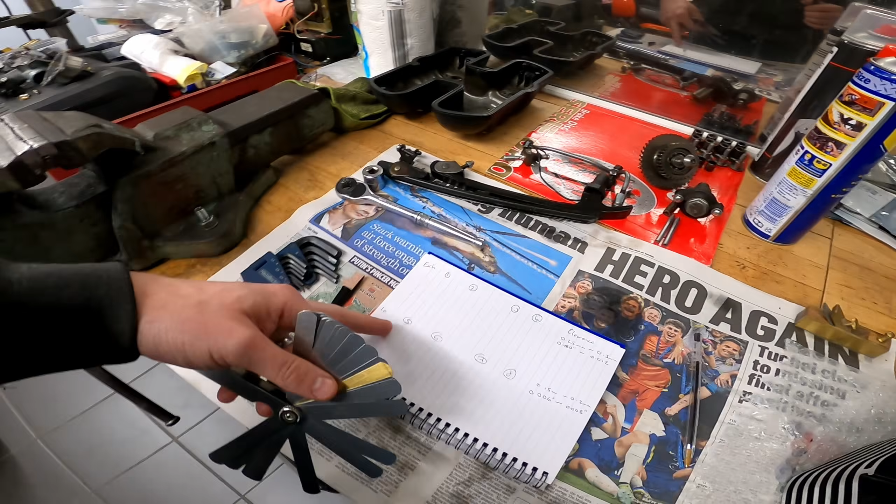Okay, so hopefully this is going to translate. You see I've got it marked out here, so just exhaust 1, 2, 3, 4. It's an 8 valve head. And inlet 1, 2, well 5, 6, 7, 8, but 1, 2, 3, 4. Then over here I've got the clearances noted, so it's 0.25 of a millimetre to 0.3 of a millimetre, and 0.15 of a millimetre to 0.2 on the inlet side, which correlates to 6 thou to 8 thou of an inch and 10 thou to 12 thou on the exhaust.

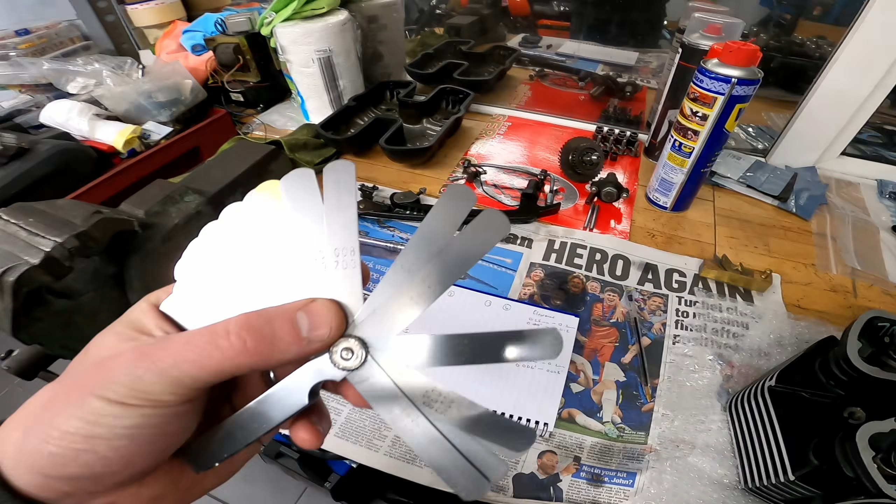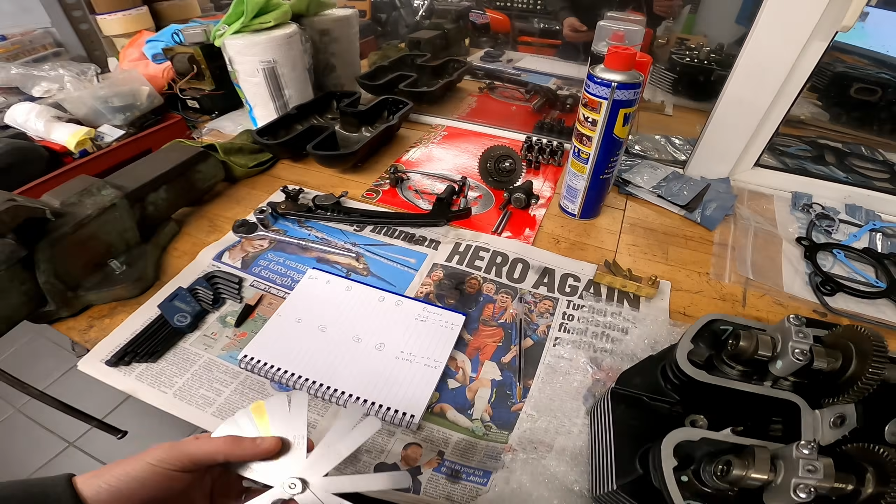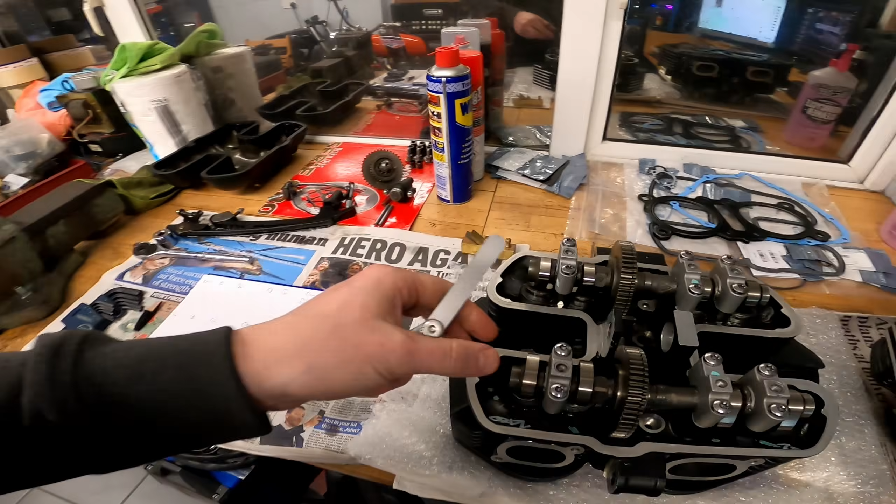So what I will literally do is just take the bottom tolerance, try that in, and then work my way up and see where we land through a combination of these. So you can see, for example, if I take the inlet, so 0.152, I've got here, a bit difficult to film, I'll come in from the top, and so that goes in. A little bit of drag there, but not a lot, so we're going to be a little bit more than that. So I'm going to work my way through these through combinations of feeler gauges, mark these down, and then we'll see how far away we are.

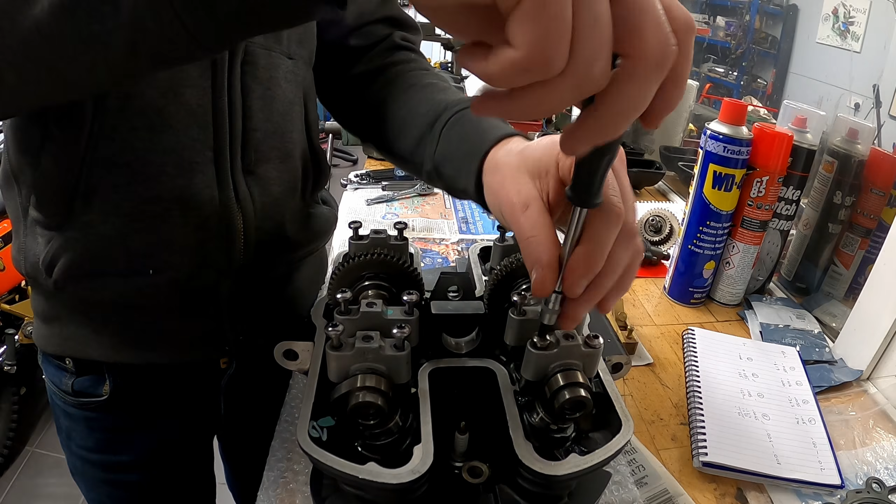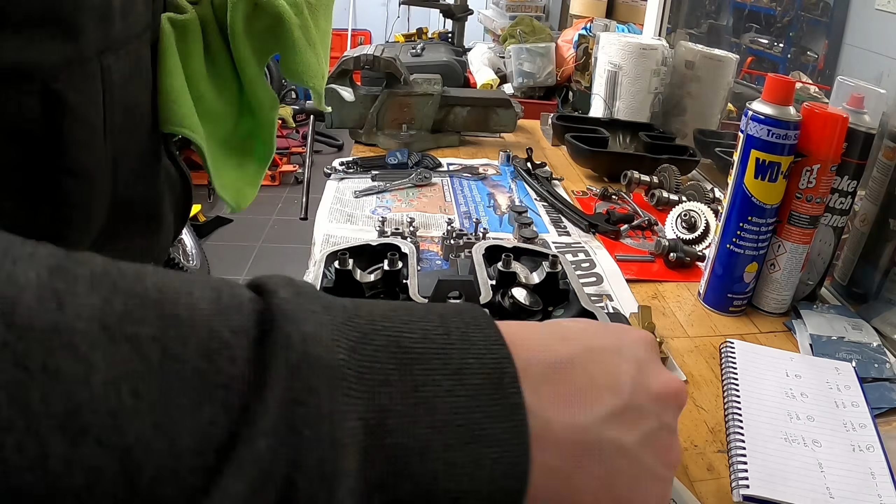So you're okay with that footage? Well, yeah, that what you've just done. Yep. Yeah, that's fine. Okay, so I've just explained to you valve clearances. And then you're going to tell everybody how we do valve clearances, and then I'll tell you what the calculation is. Right, but I don't think I fully understand.

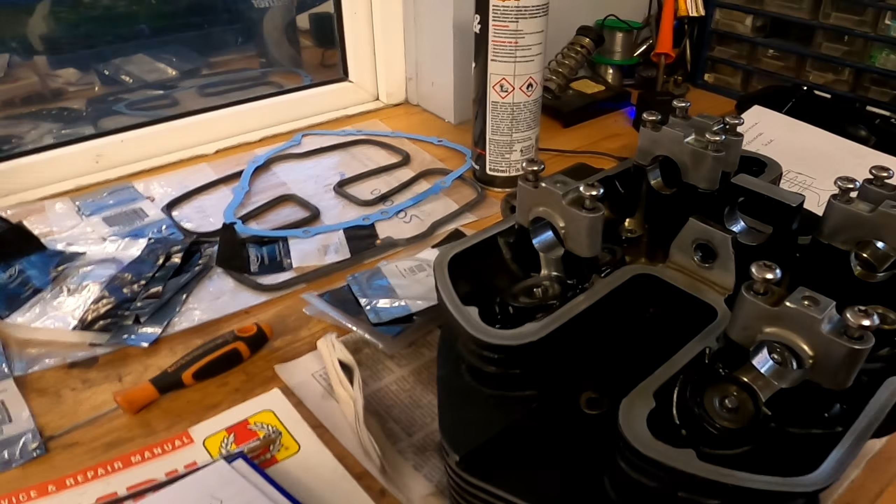Okay, right. So these pieces, I'm sure I've got a name. Camshaft with my pear drops on. Cams. They go inside along here, and then my pear drop is going to turn round, and the pear drop presses on this, which is lower in here, and so each of these valves are different heights, because each of these round things have these little bits in them that are different thicknesses, and we have to work out which ones of these we need, because you don't put more than one in.

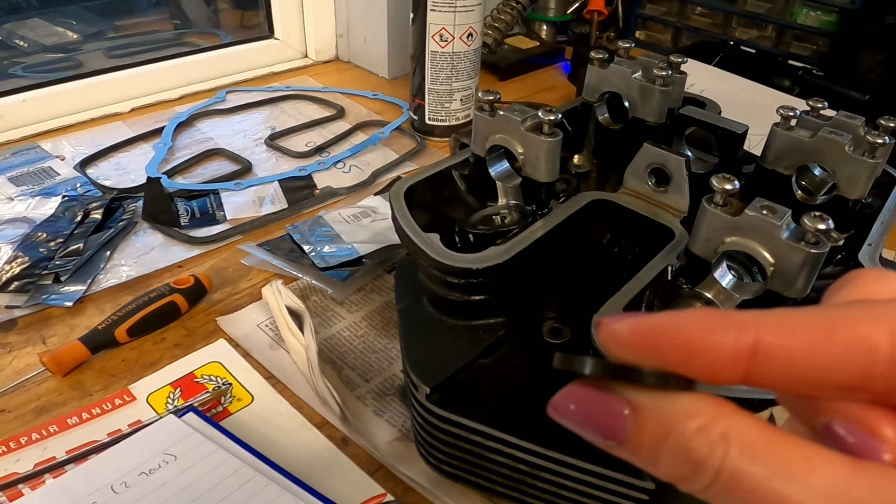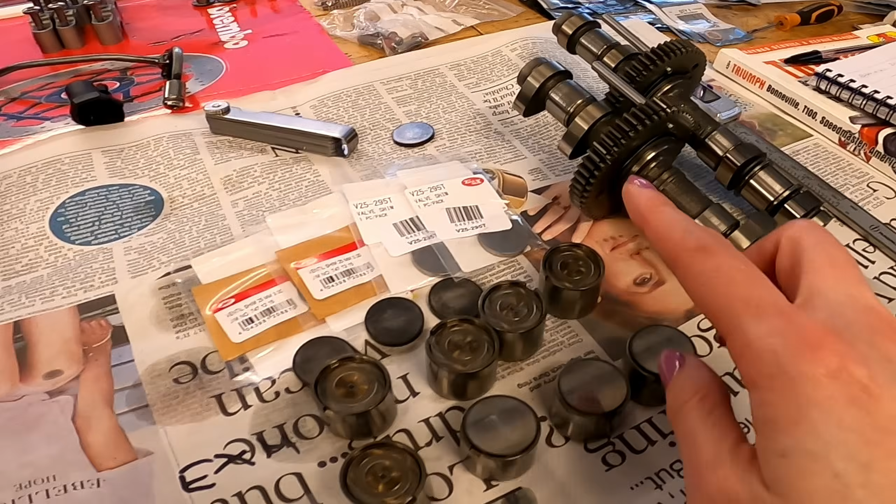These are different thicknesses, so we need to work out which thickness we need to go inside. We've got 5 remaining. Joe's worked 3 out, and we've now got to work out which thicknesses we need to go in there for when my pear drop turns round and touches it to press the valve.

But what I don't understand is why they're all different. What makes them different? Whether the pear drops are different sizes. So these will be different slightly on tolerance, plus they'll have worn slightly differently. Then how compressed the springs are against the valve, because the valve seat will be slightly different, because you've got a machining tolerance for these to be sealed in here.

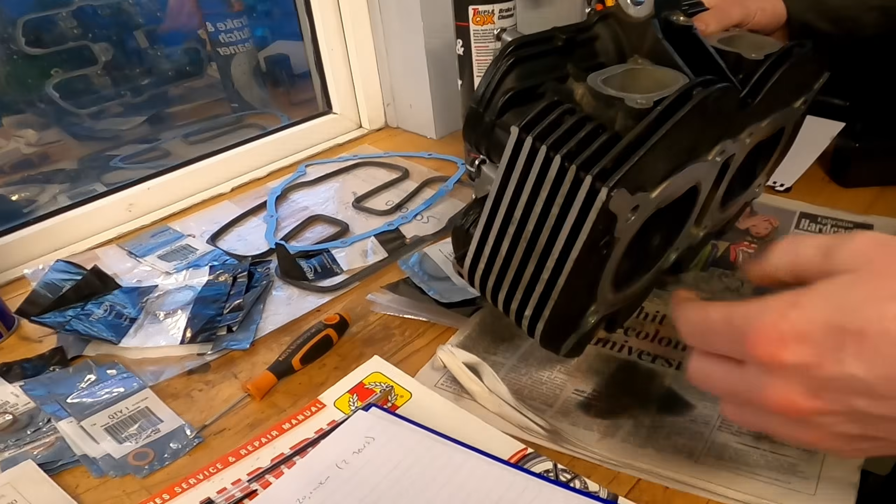So that's the other end of that valve. Okay, so under the thing that was poking up, there's a spring. Yep. And depending on how compressed that spring is, based on how long the valve is. So there's a couple of differences. So okay, help me understand. You've got very badly drawn cam, pear drop.

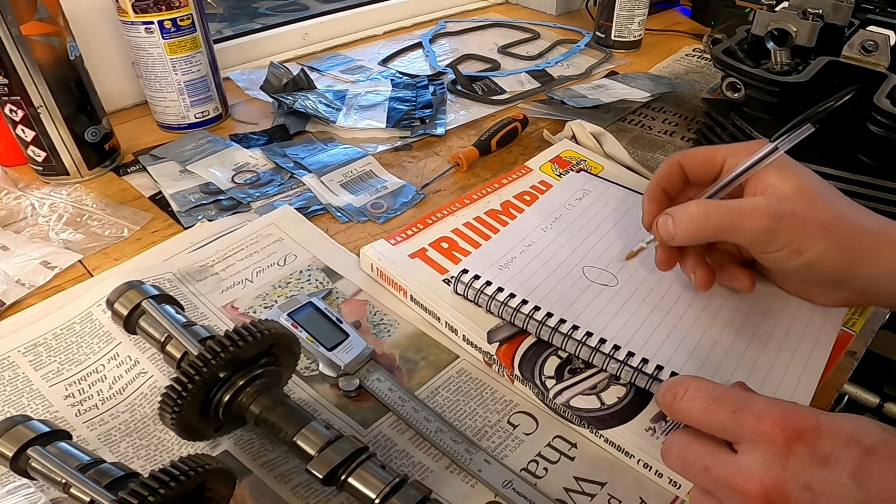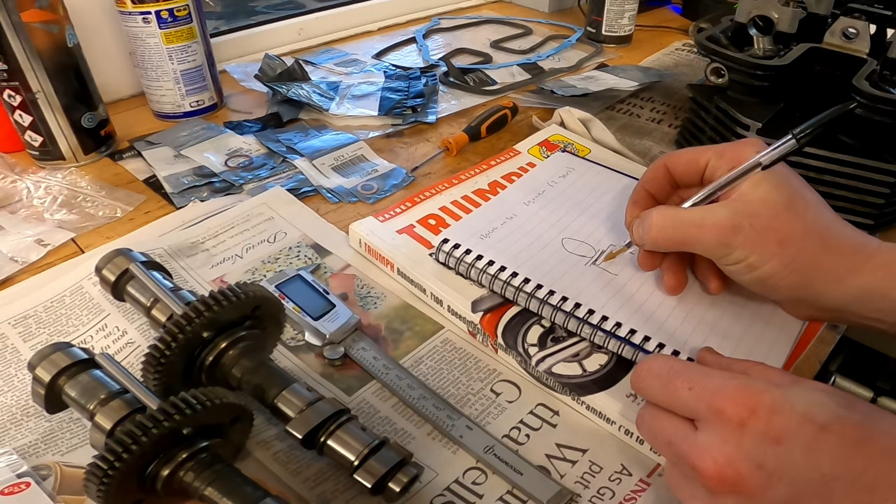Then there'll be a gap. Yep. Yeah, that's what we're trying to work out. Yeah, under that gap, there is the bucket, which is this. Which is those, yeah. In the top of there is the shim, which is what takes up the tolerance. Okay, so we're trying to get that to an ideal thickness, and it's different for the inlet and the exhaust. Okay, this then, as you said, acts upon the valve, which is a very badly drawn valve.

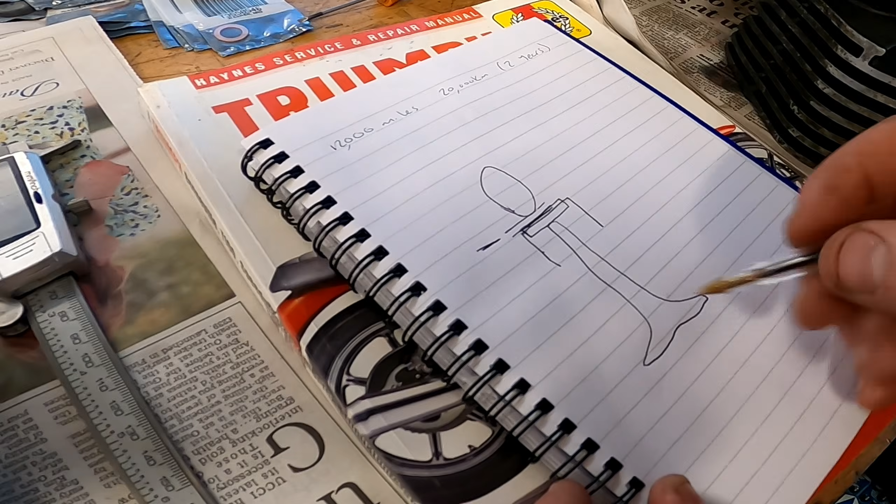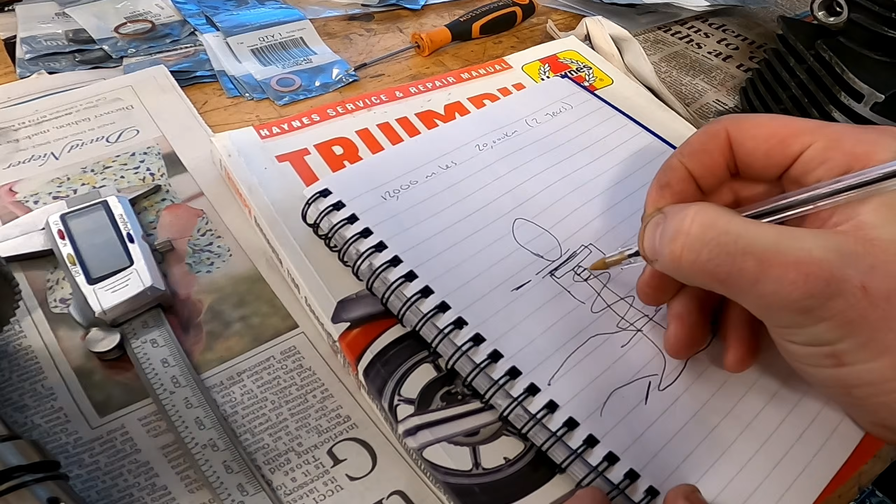It's like that in the cylinder head. Yeah. Okay, that sits against the seat here, and then there's a chamber like this. Then there's a spring in the cylinder head. Okay. The collet there that holds all this together is retained by a groove here and some little pieces. Okay, that sits on top of the spring, like so.

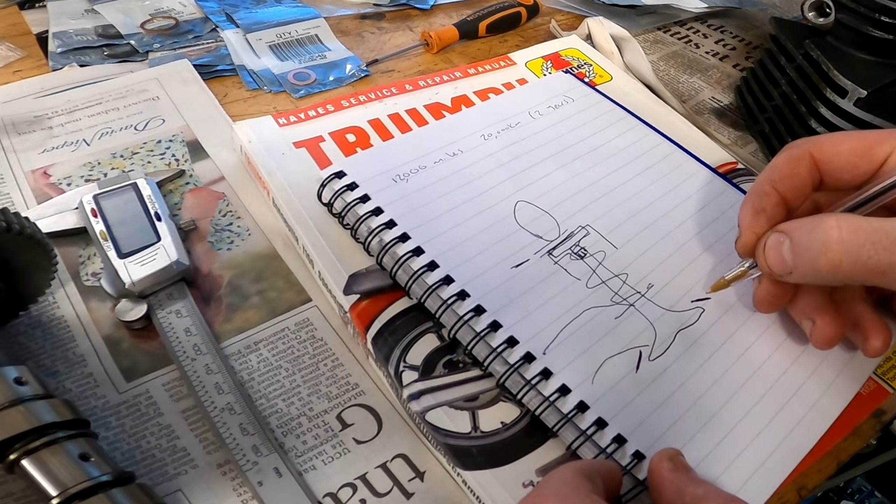So what we're trying to account for is this will have been machined slightly different, and these edges will have worn slightly different, and so will these. So this will have changed. In general, it will move this way, right, making this move higher up.

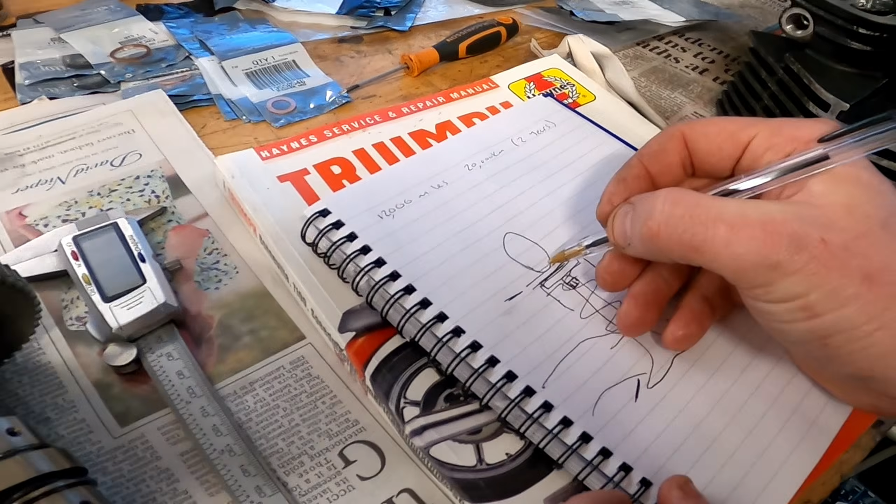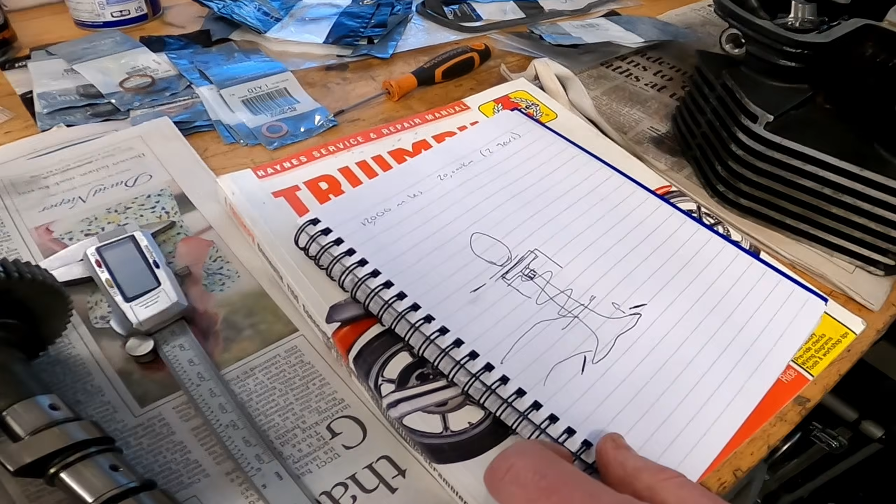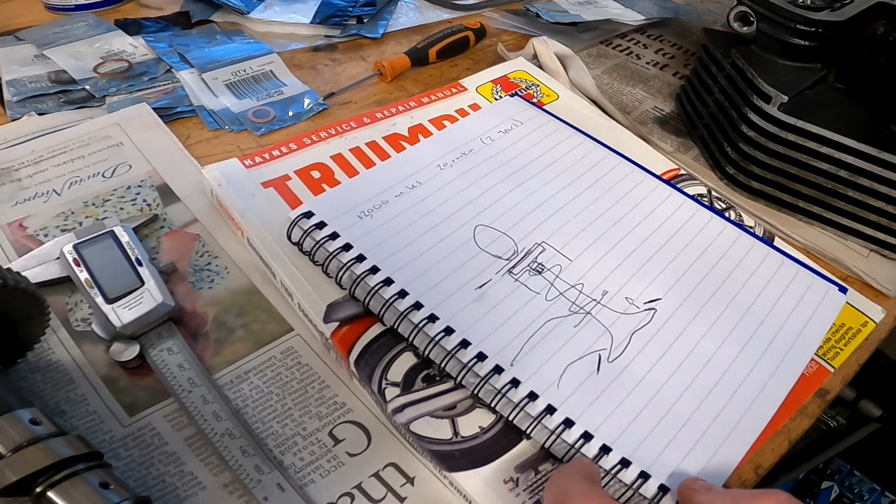If this is all moved up, the gap is smaller, but if this is worn, the gap gets bigger at the bottom of the cam. Plus, when they're manufactured, they'll all be slightly different, which is why you have the shims. So when it's worn, it's because we're using a used engine in the first place—these aren't new pieces, so it's been worn through previous use. But also these ran in a different cylinder head, so the clearances will be different, the way it was machined will be slightly different. There's tolerance on everything, and that stack of tolerance is what makes the difference across the valves.

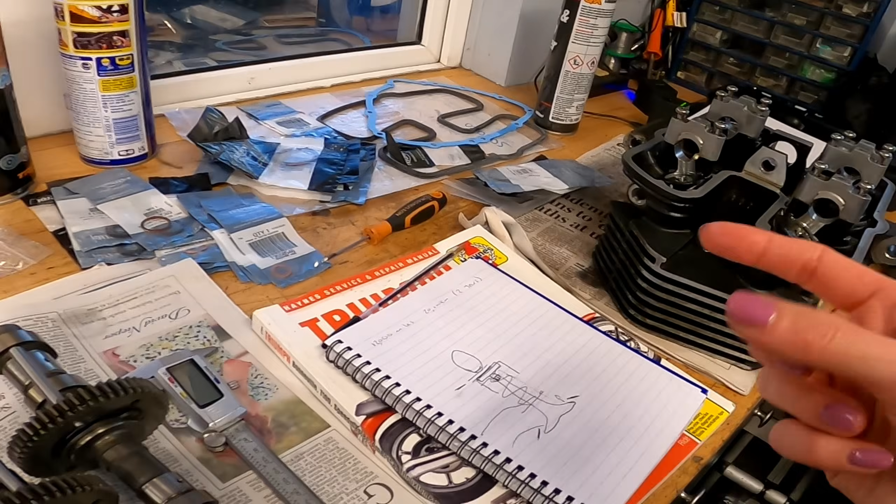So for each one we've got to account for all these variables: the differences in the wear at the bottom, how compressed the spring is, the wear happening at the top, and the wear on each of the pear drops inside. They'll be different on both sides too, because one's the exhaust side and the other is the inlet side—so in and out. The exhaust side has a bigger tolerance because it gets hot.

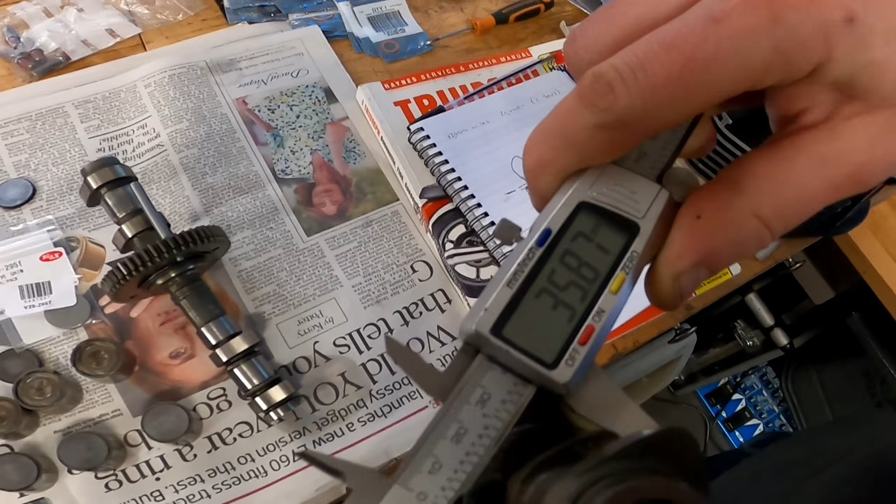Just do the top again because I missed it. 0.87... okay, 35.9. So that's 0.3 of a mil difference, cam to cam. Now our tolerance—the top end of our tolerance is 0.3 mil, just as a gap.

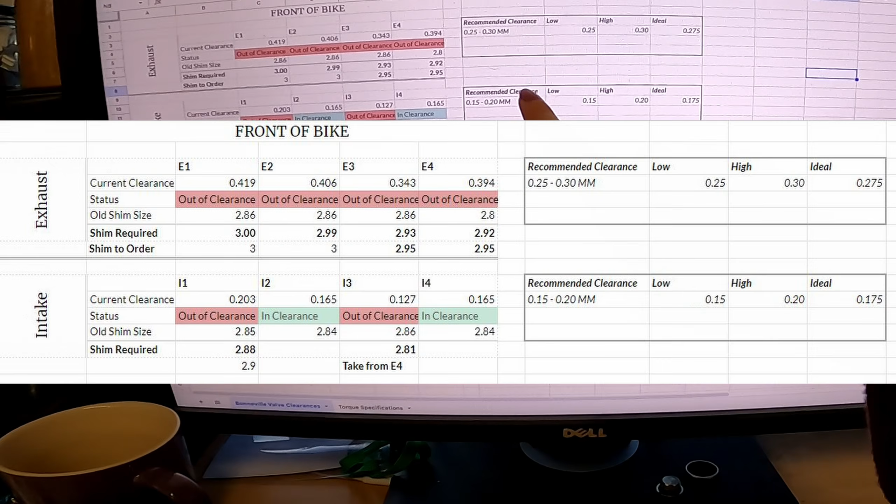So you've already got to account for that in the shimming, in your spreadsheet. So I've cheated—I don't know if this is going to translate on the camera, but Joe has put into the computer a recommended clearance for the exhaust and for the intake. So when we're measuring it, we can see what the numbers should be in between. And then he's done some Excel spreadsheet wizardry to work out what the new shim number is going to be. Okay, so let's work it out.

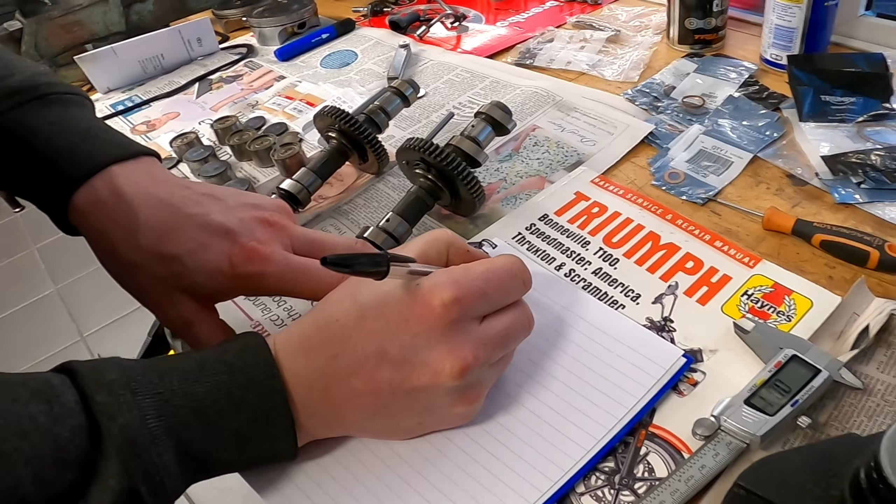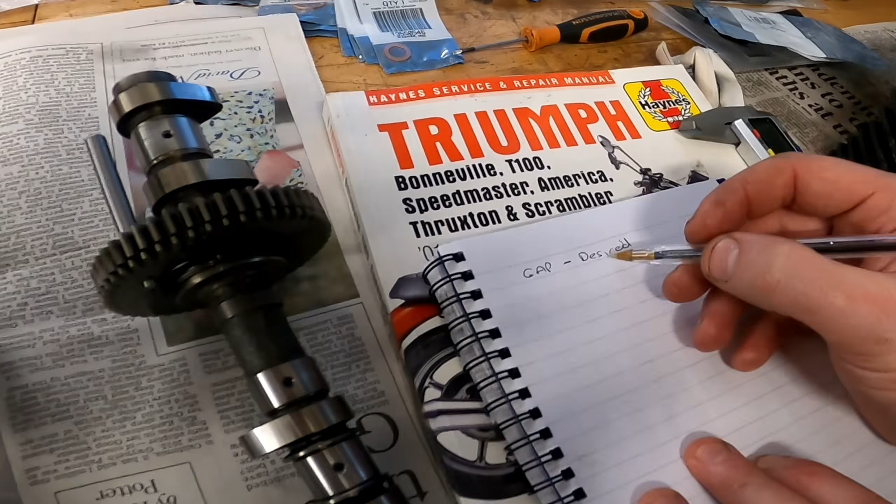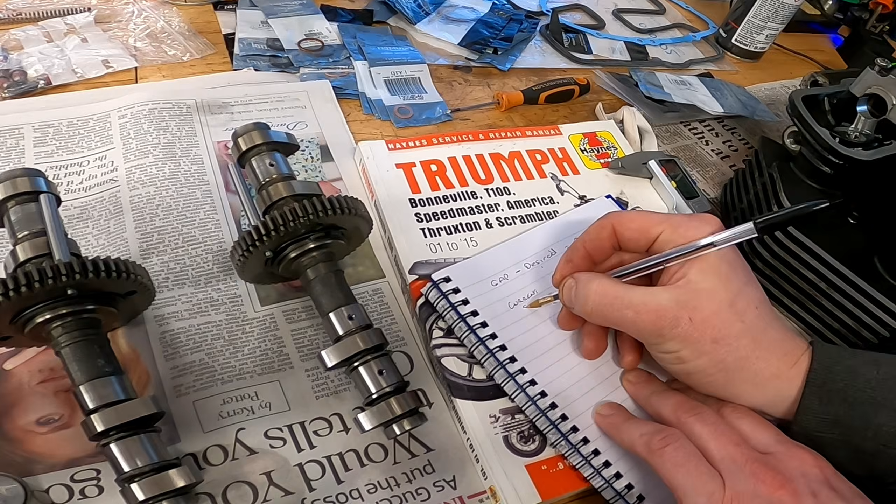So what we do: as I've just measured, we take the gap that we measure, and then we take away from that what our desired clearance is. That gives us a difference. Then we take the current shim size that's fitted when we did this measurement, and we add this difference. That equals our new shim size.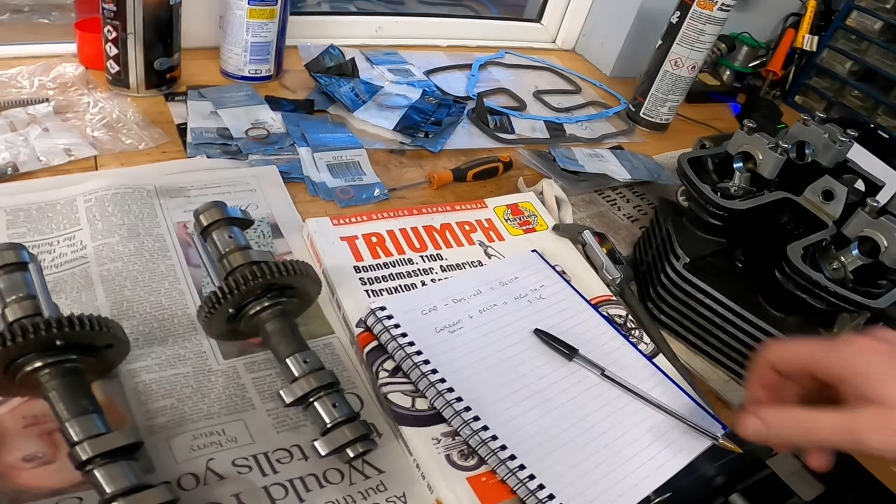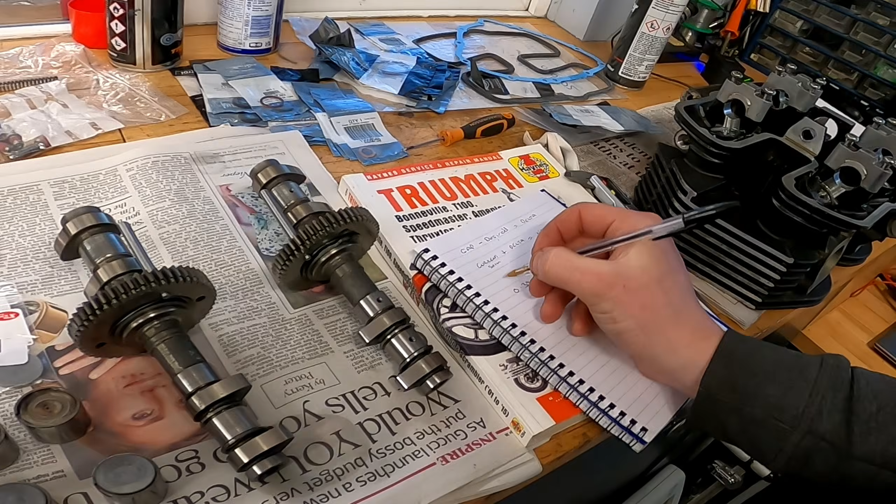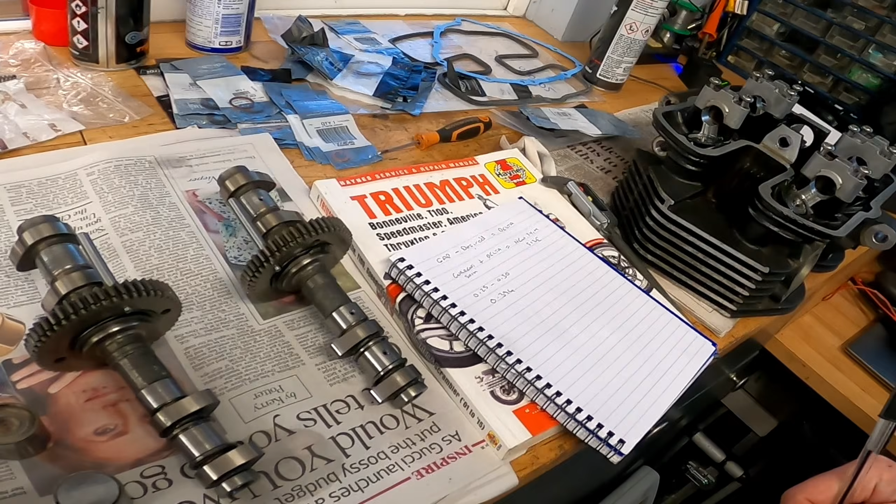So in this instance, let's pick a cylinder—if we take exhaust number 4, what do I measure that at? The current clearance on that was 0.394. Our tolerance window is 0.25 to 0.3, so that's out, isn't it? Yep, it's too much. So to get to midpoint, our desired is 0.275, which is bang on between these two. Which gives us, I've got it written down so I'm cheating, 0.119.

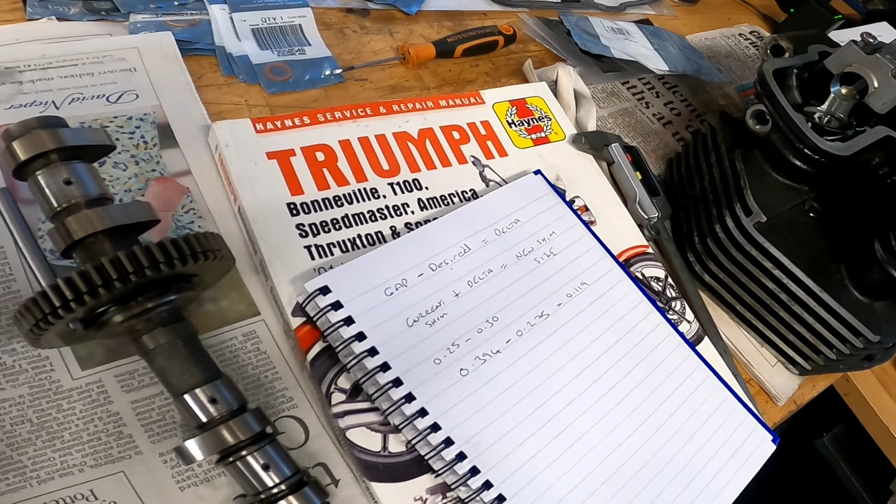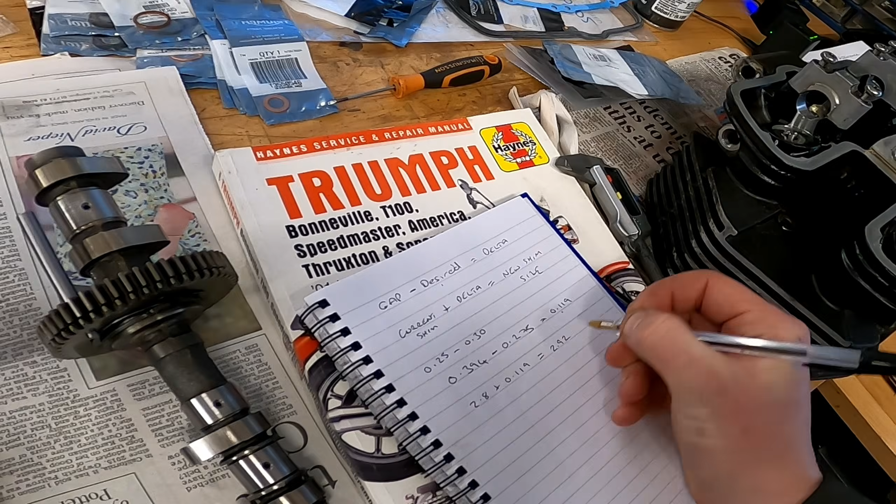So then if we add this to our current shim—the current shim was 2.8—that equals 2.92. You have to round up or down because the shims only come in zeros or fives. So we end up putting a 2.95 shim in, and that brings us down just below the tolerance.

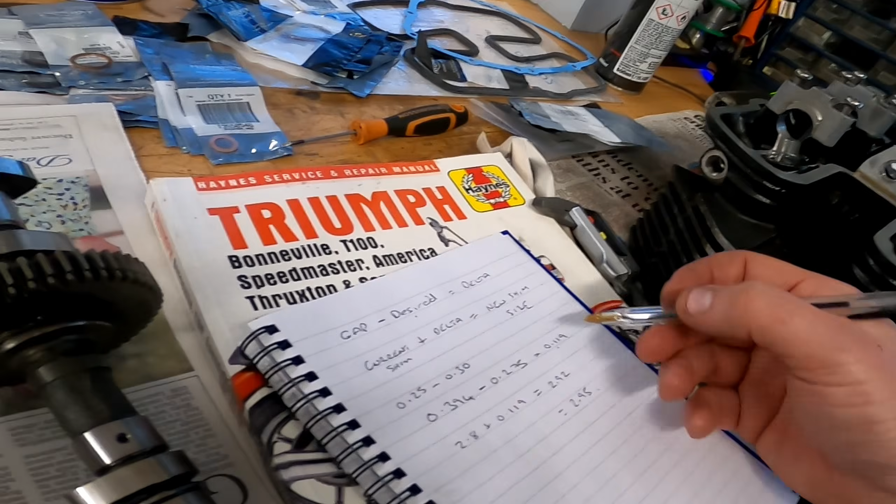So how do we know which one of these was that one? Is that the way that you've laid them out? So I've already written exhaust and inlet, 1, 2, 3, 4, 5, 6, 7, 8. So this was exhaust number 4, and we want a 2.95, or 0.295. So how do I know what's what? 295T—and we put that then on the top. You take that out of there then. Come on, Prentice.

You want a little bit of oil on that. Does it have a right and a wrong way up? 'Cause it's got a number on one side. We put the number on the bottom.

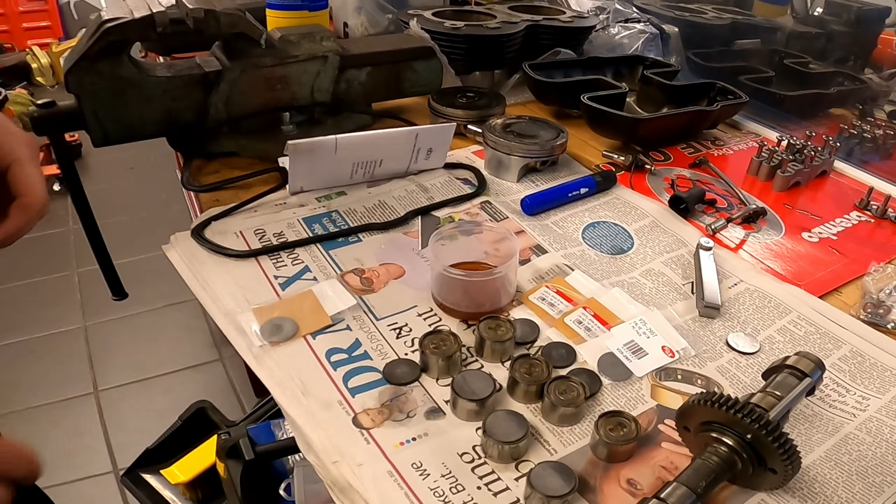I was going to drop it in. You only want a little bit on the one side, smear it and pop it in.

What do you notice about this? I noticed a lot of things. Are you wanting me to notice this gap here? Yeah, I feel like that's what you want me to notice. Do you know what this is doing? Looks like it's holding these together because it goes through both of them. So in here there's a big spring. Oh, they like springs, don't they?

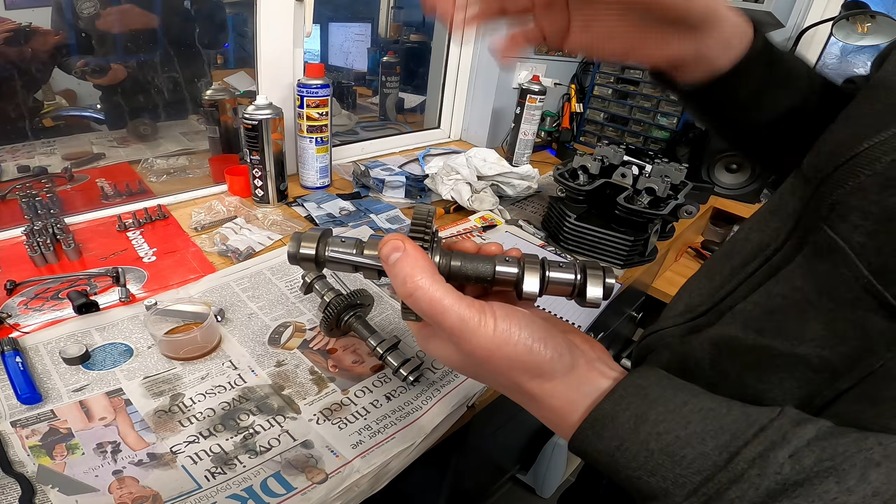Yeah, it tries to make this gear go this way compared to this gear. And the reason that's done is to make, when you engage this in the centre gear that we put the chain on last video, it's designed to make this sit tight in those gears. Because one's trying to twist one way and one's going the other. And that's done so when you're driving the centre gear, it's pushing against this, then this gear set is tight.

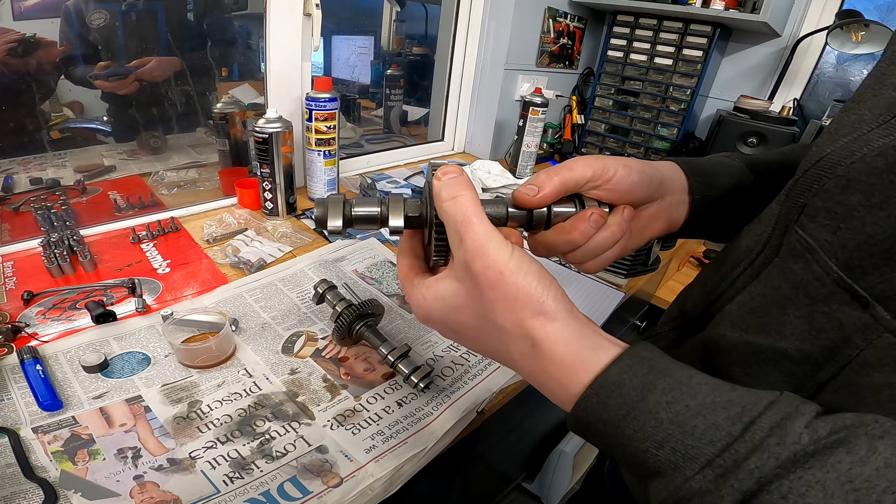Okay, but by nature of clearance on gears, if you get these here, there'll be some chatter. What this is designed to do is stop that. So when you're driving it one way, it stays tight. When it goes the other way, you come up against this sprung-loaded gear. That stops these chattering when you take the load off. So they don't like any wiggle room. No.

So the way to set these, 'cause obviously the spring, this doesn't sit in line. This hole here wants to be over here compared to this one. So is there a tool or something you have that twists that? So there's a tool that has 2 pegs that sit in this hole with a handle on it, and you turn that, holding it against this hex here, it's like a nut.

So you hold that with a spanner, lever to this. And then have a second person put the pin in, which I've already done. And I'm not undoing them again. How did you do that without a second person? Exactly.

Other key thing: one's the exhaust and one's the inlet cam. How do we know the difference? Can you spot the difference between the two cams coming? Can you spot the difference?

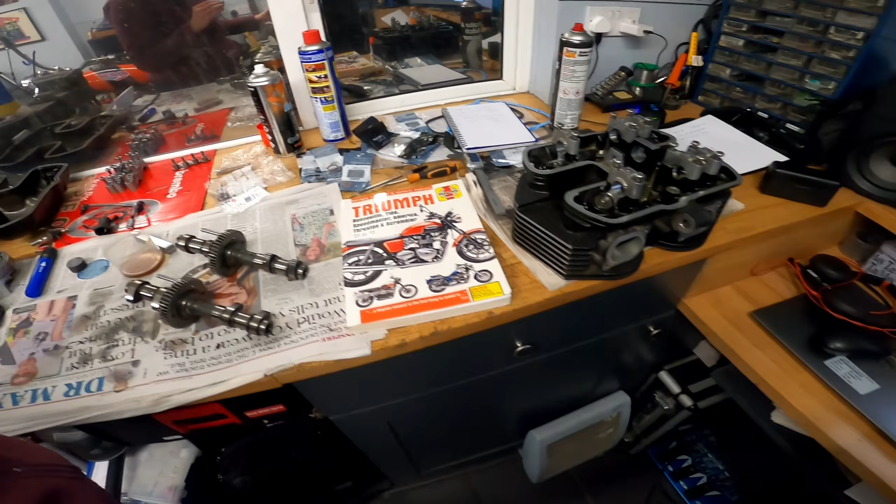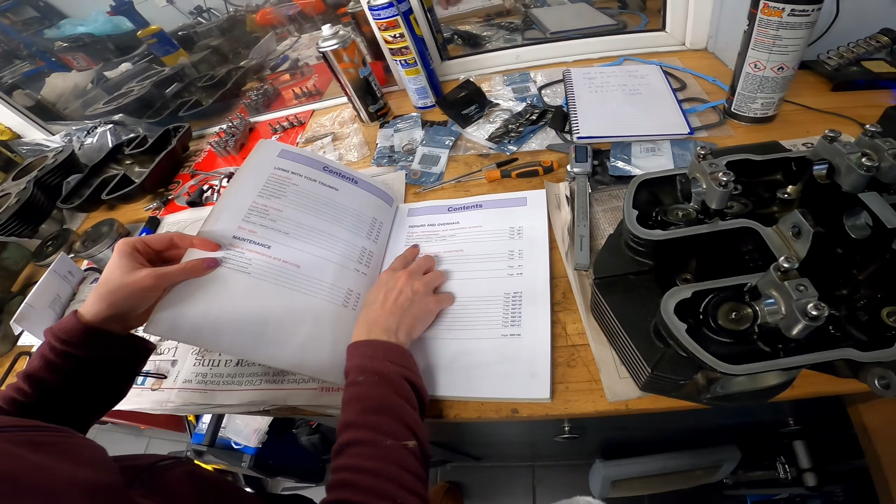So hang on, how do I know what page I want? What we're doing, I'm doing the engine. So what does the engine come under? Page 2.1.

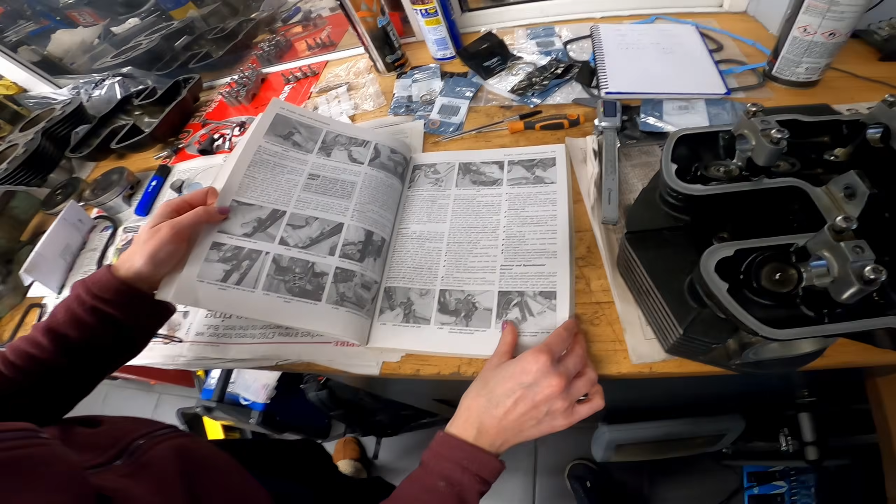There we go. Oh, here we are. Okay, these are...

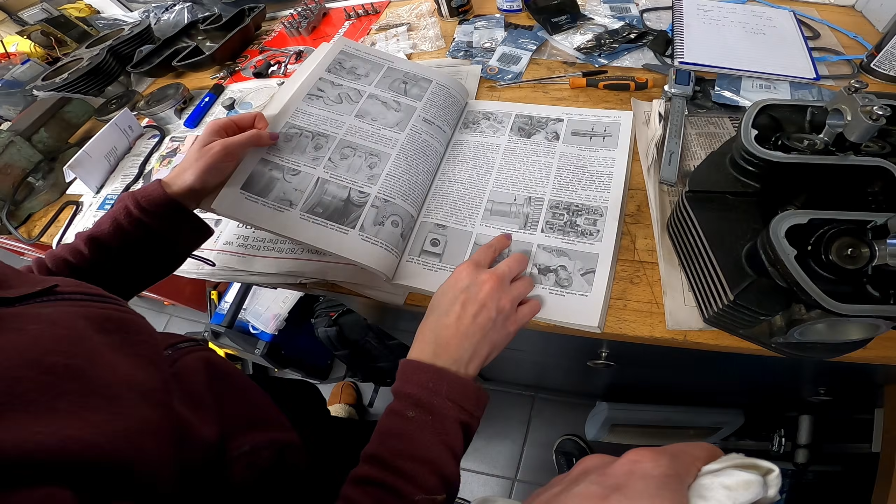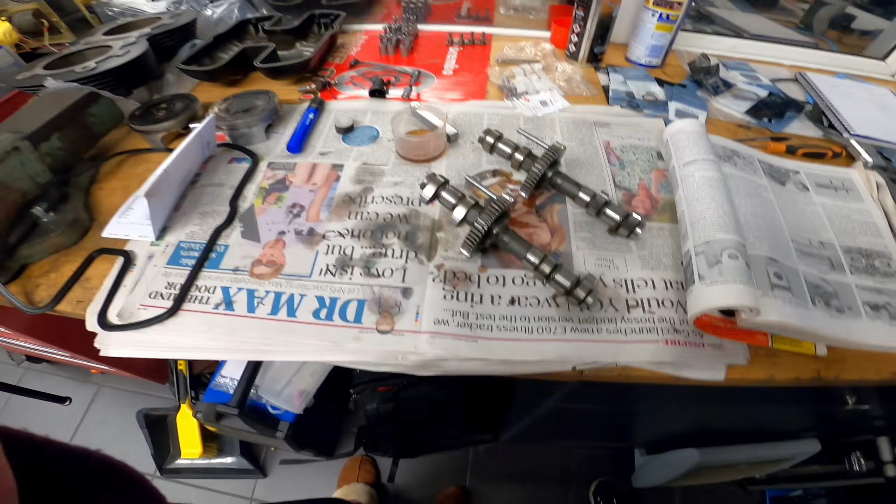Note the groove, that arrowed one is the intake camshaft. So that one's your intake and that one's your outtake. I feel like that did take me longer than the outtake.

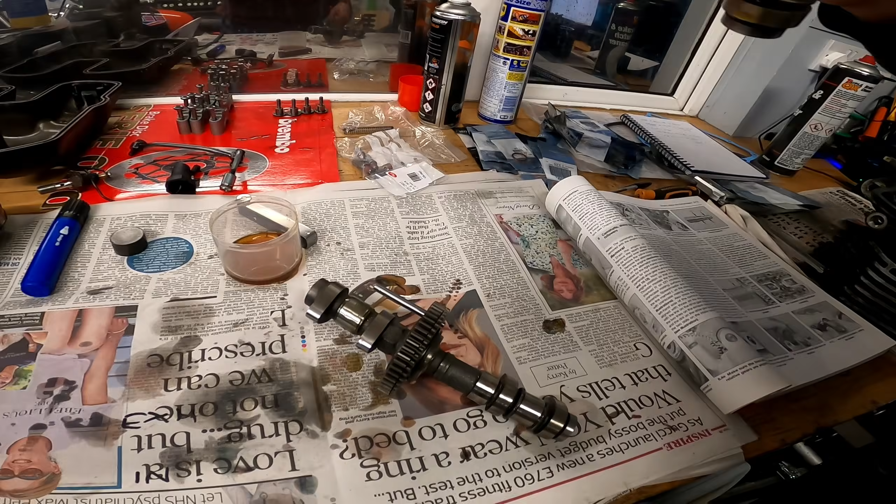So there you go, now we're going to fit these in. The exhaust one is oiled up, and you see we've got two dashes. They need to line up with a dash somewhere on that other wheel.

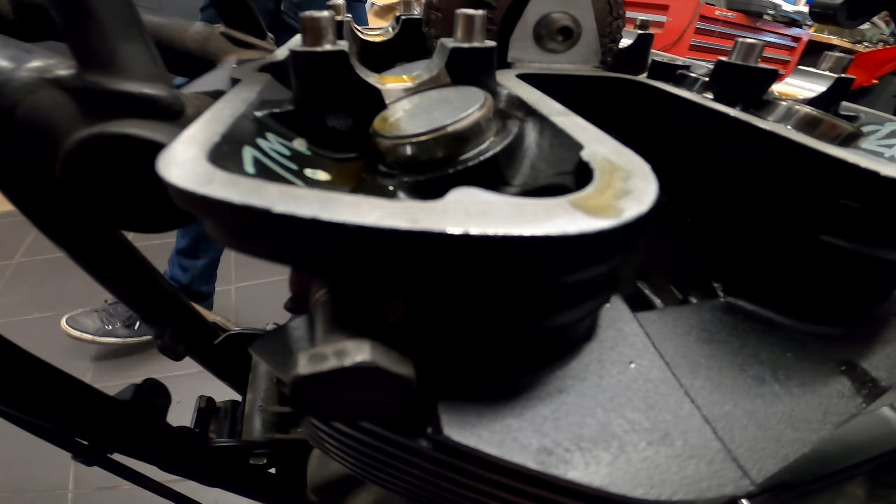With the chain on, you want me to find the dash now, don't you? On the other wheel. I'll give you a clue, it's on the other side, this wheel. Oh, you're so helpful, I get all the clues. Ah, here, you got a dash, yeah?

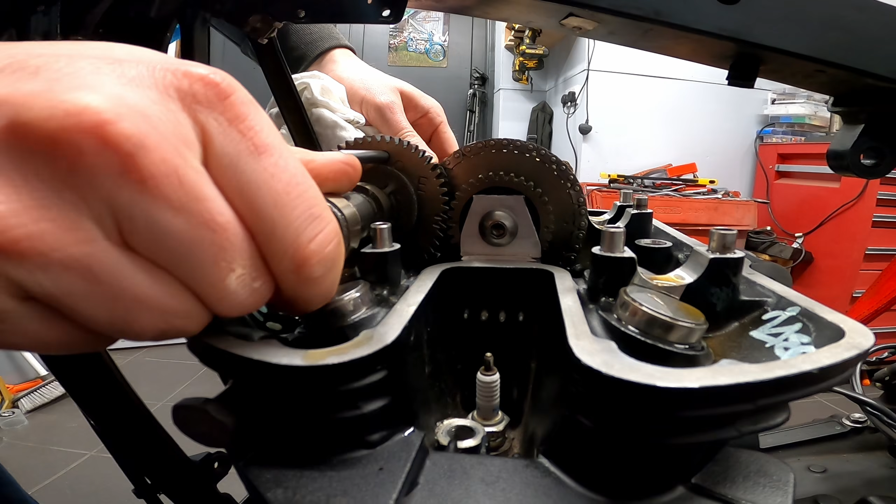Okay, so I'll put this one in, and then you're going to put the inlet one in. So as you can see, there's our dash. So you go down a bit, and there he is.

Oh, Freddie, if your bike doesn't work later, this will be why.

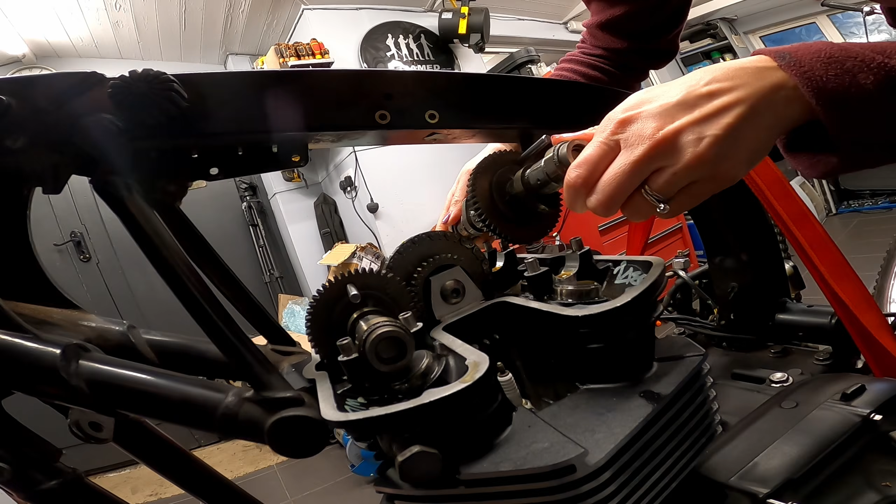Pin in place. It can't go over that pin though, can it? That could be a challenge. So has it got to go under the pin? Not if one of my pins are too long. I think your pin is too long, it's in my way. Let's try again with some shorter pins.

Yes, so you now want the shorter pins as well, and I've got an exhaust, intake and an outtake. Go on. You said go on, but it didn't sound like go on, it sounded like you called me something. Oh, I thought you were doing it.

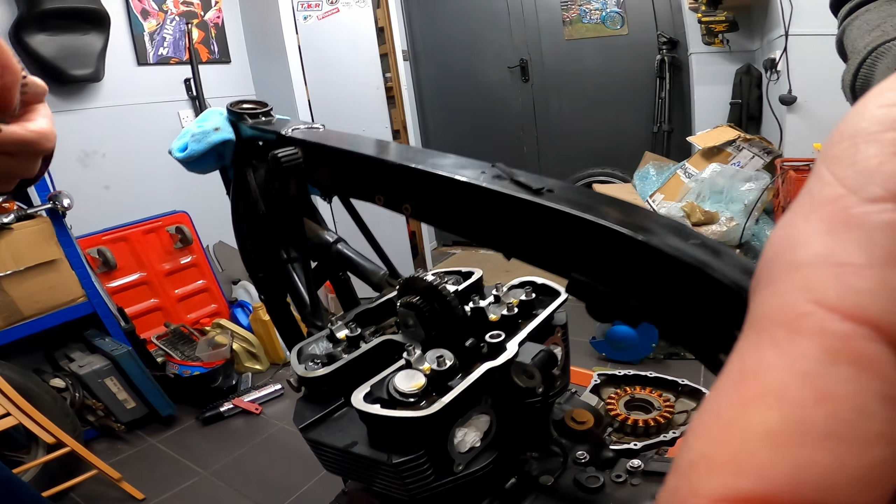No. Oh, I've got to line my dots back up. Is it dots or is it dashes? Oh, it's dashes. There's dots as well on there, but which side are we doing?

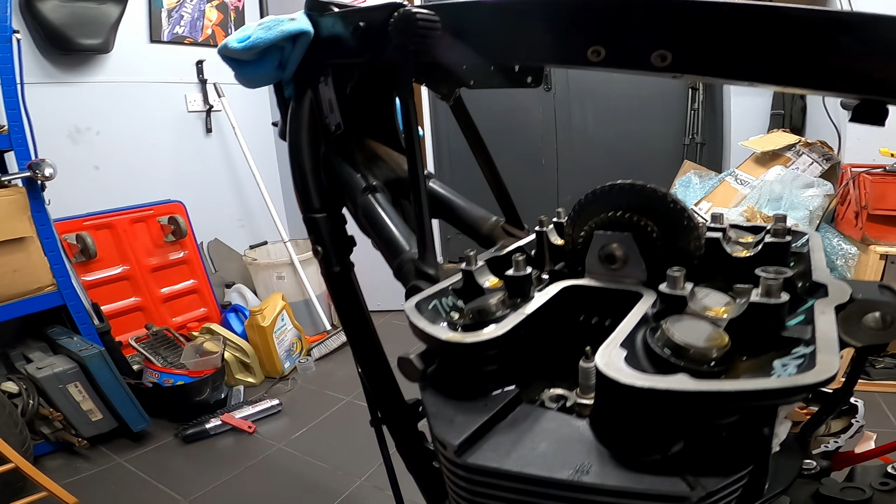Oh, I've got the exhaust, which goes on this end. Goes in this way. Oh, so I had the other side last time, did I? I'm well confused, I've lost my lines. Now my hands are just all covered in goop.

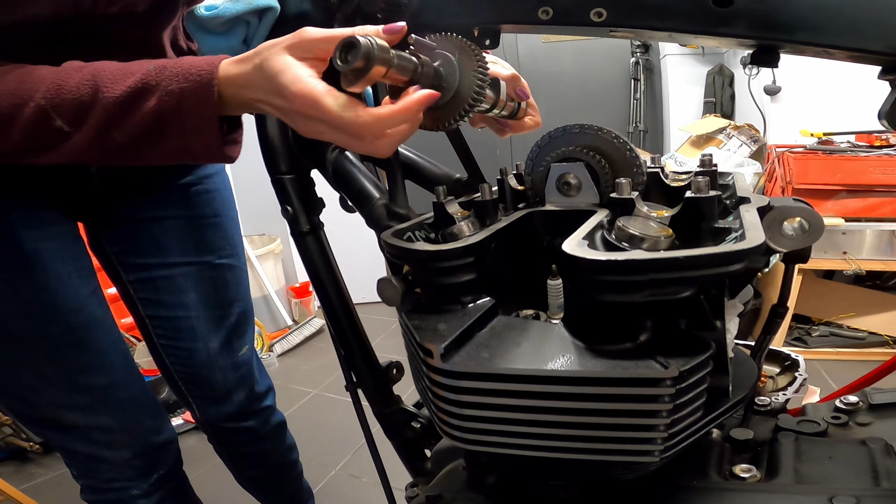This might require a photo. Yeah, I think so, I'm going with that. And then you wanted that in the middle, roughly there, like that. Okay, I'm going to get the other one while my hands are goopy.

I feel like that one should be at the back because the exhaust is at the back of the bike. No, the exhaust comes out the front. That's what's confusing me in my head. The intake should be at the front and the exhaust should be at the back. Where's my dots gone? I think Triumph have just got it all wrong.

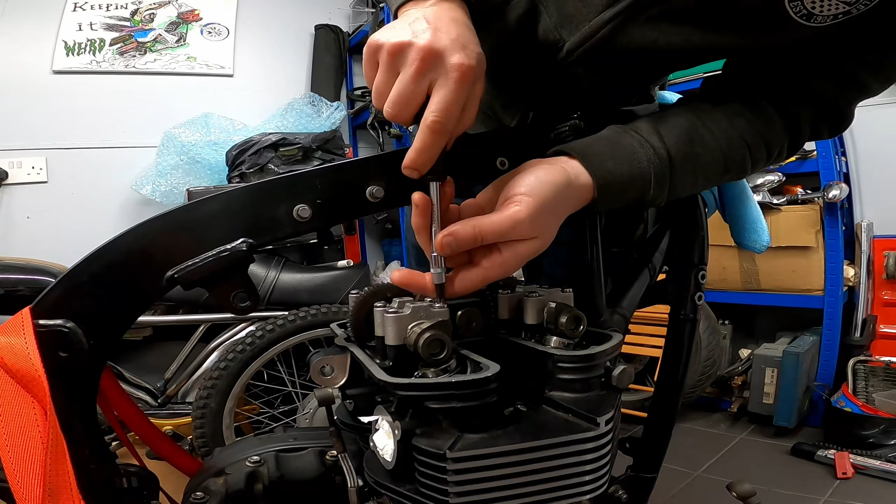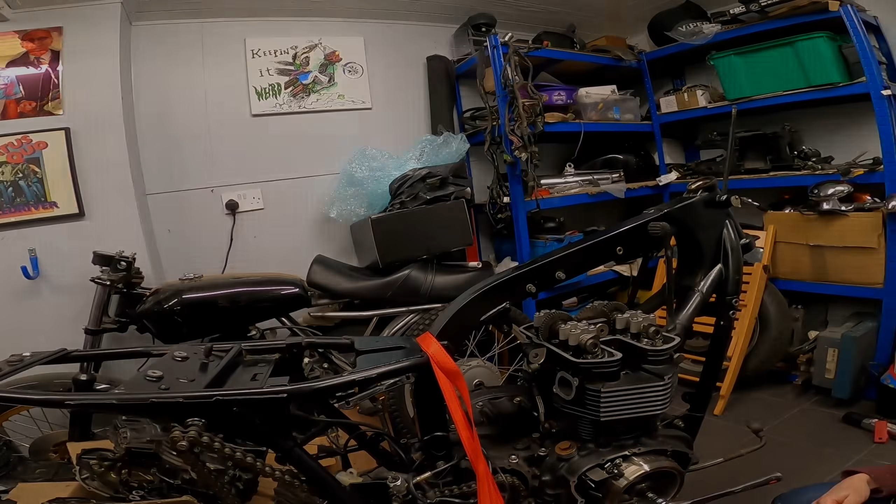Right, can't remember where we got to. We're all back together, cams are in. Torque down. These are all lined up, your dots are lined up, your lines are lined up, and these are all in. The R's lined up. I've checked it, I've got my little ruler out because I've got a line here.

Okay, so we're going to spin this 4 times, and top should be at the top. And my lines should also be parallel. Right, and your dots and your dashes should line up. Dots and dashes. Okay. So you have to spin backwards. Okay, 1.

2. Oh, it smells funky. 3. There's number 4, here's number 4.

Got good compression, isn't it? It has. I feel like I don't. Right, need a little bit more in.

Yeah, oh look, top's at the top. And my lines are there. And my R's here. I'm going to take this off. My R's here, and I line up with that line on there, and that line on there. Job's a good one. Go and check your dots and your dashes. Oh yeah, I see, so these dashes this side, and these dots this side, are all lined up. It stinks.

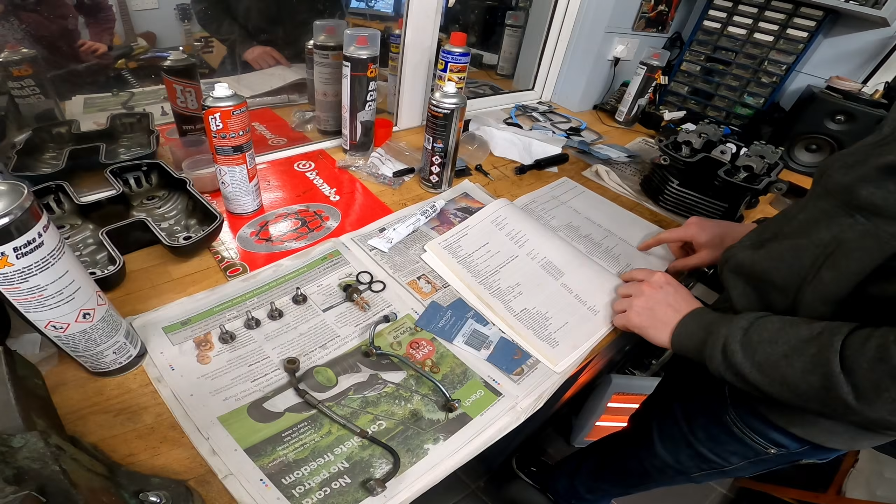One of these, what is a Newton meter? You've used the term loads and I've just kept repeating it, but I don't know what a Newton meter is. Where are you pointing? To the bits of stuff.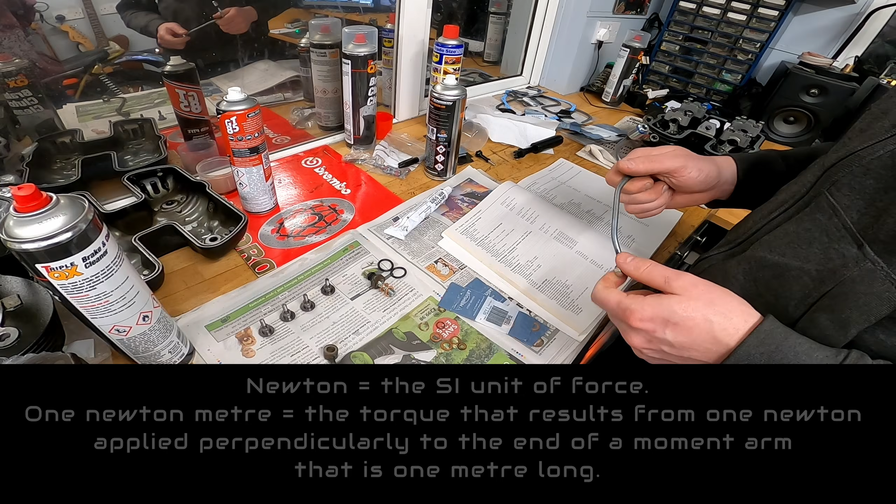Newton meter, so a Newton is a measure of force. Okay, so a given applied force, applied as a torque around a central node. There is another word for that, I can't think what it is in my head. At a meter's length. Okay, so a force of pressure applied from a metre away.

No, around a point. That face said, no, you've got that wrong. So it's an equivalent of, say, if you had a bolt, that's your central node, and then a meter away you apply 1 Newton there. Oh, okay. And a Newton is a measurement of pressure? Force, not pressure. Force and pressure in my head are the same thing, but they're clearly different to you. Okay, but from a meter's distance. Okay, I'm with you.

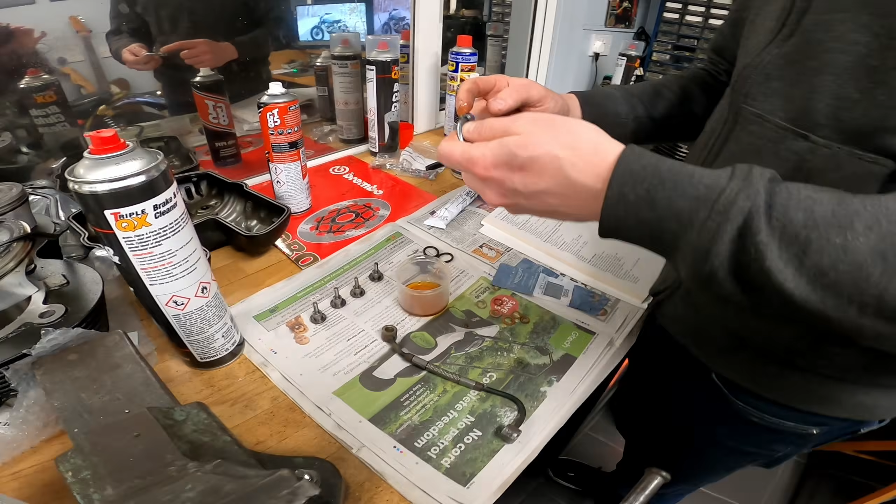Okay, oil lines. So this is the cam oil feed from the oil gallery. We have a nice shiny new O-ring, and we have 2 new copper washers, because we like to fit those. So this here is the feed from the gallery, which comes up from the pump. So it all comes up out of here, into here, and then feeds this camshaft, and then comes across here and feeds the other camshaft. Okay. So it just slots in.

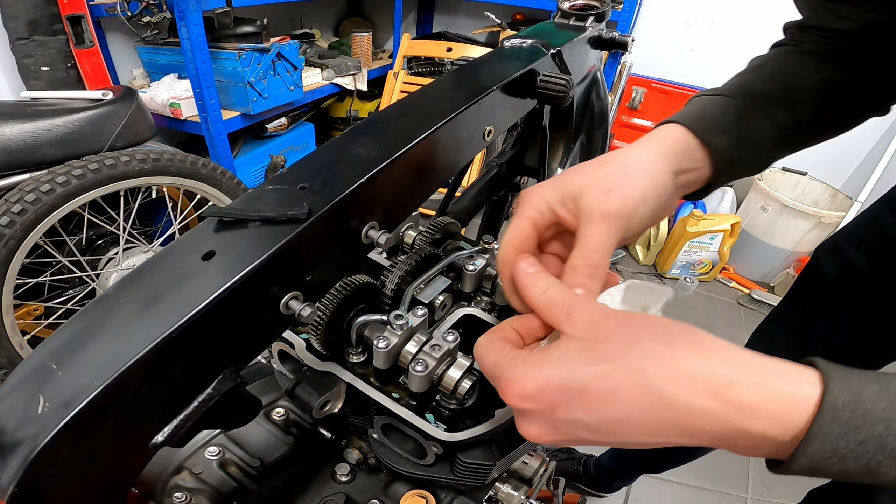So it comes up from the back of the engine, from the exhaust side. No, I'm the wrong way around. I said this last time that I feel like the exhaust should be this side because this is the back of the bike. It's back to front. So there's that one, and there's that one. And you've already preset your torque wrench. Yep, 8 Newton meters. That was simple.

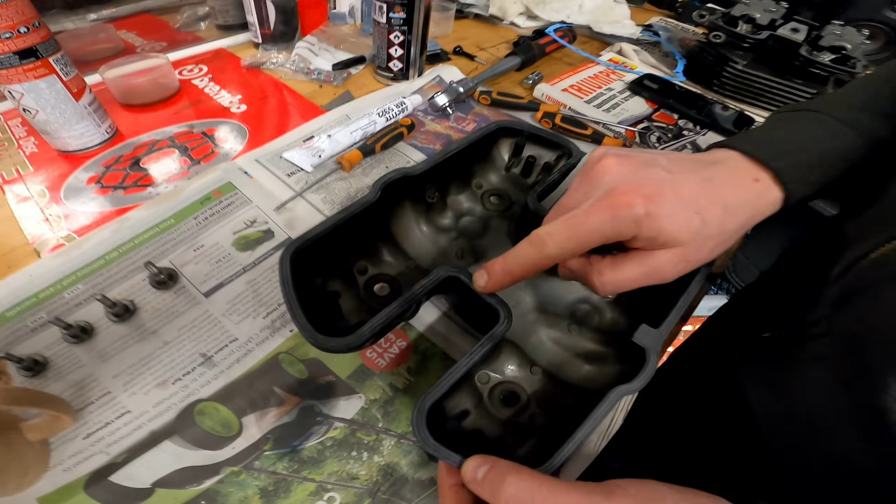New gasket on the engine cover. Which is interesting because the new gaskets they supply, these new gaskets here, do you notice something different between that one and this one? Oh, there's more lines, dents. I don't know what we're going to call them. It's a change. What was your question?

I was asking, that gasket's obviously a rubbery gasket, but some of the gaskets have felt like a plasticky material. And I learnt through the comments on the channel that you can buy gasket paper, and some people have queried whether you can make your own gaskets if you've already got an old one, like cut out a template. So like that base one that was really rare and difficult to come by, could you make your own? You can, if you were really stuck, but you'd have to make sure that it was the right thickness and was going to compress to the right thickness. It wasn't as critical in older engines for deck height, as long as you didn't have parts clashing, because you could just tweak the carb to account for the compression differences.

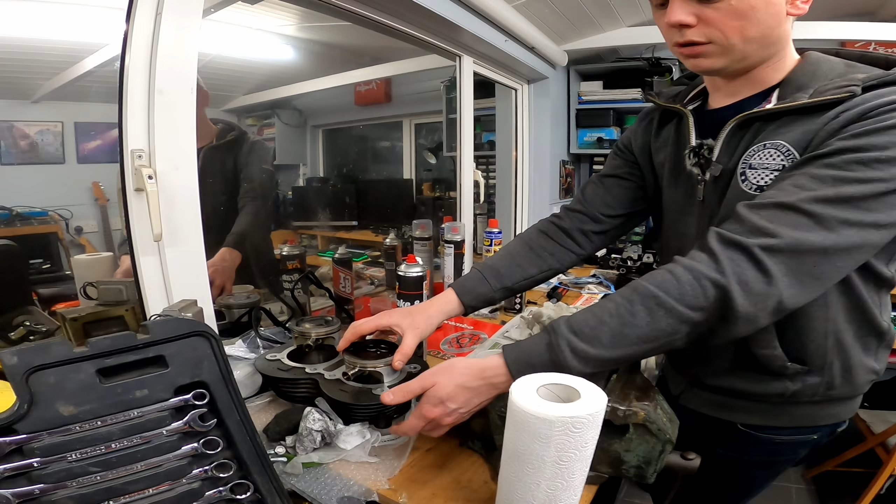Right. On a modern engine, the tolerances are so tight that you have to account for the deck height, which is a stack of where the piston crown ends up when it's in the top of the bore, so where that is in relation to the cylinder head and the combustion gases. So if the gasket down here is too thin or too thick, the piston crown ends up higher up. You're going to get a leak? You wouldn't get a leak, but you get a change in compression, so you'd have to account for that. Probably wouldn't make a great deal of difference on this, because this managed to run with the timing so far out.

So if you had a change in compression, is that what causes either a misfire or it to jolt as you're going along? Would it make it bumpy? It depends on how the engine behaves with that change. It can cause detonation because you've got higher compression, an engine runs too hot, your ignition can happen too soon. So yeah, there's all sorts that can go on.

What are you doing, just cleaning that up? Yeah, with GT85. I was just going to say, what are you using to clean that with? Where did you get that from? Don't take the mick. You have to have a little bit of Mickey taking. This bike is maintained with GT85. Oh, he'll be fuming. I don't think he will. I think he'd laugh. Yeah, I hope so. It's been really useful leaving that here because we've used it a lot. If you can't make it right, make it bright.

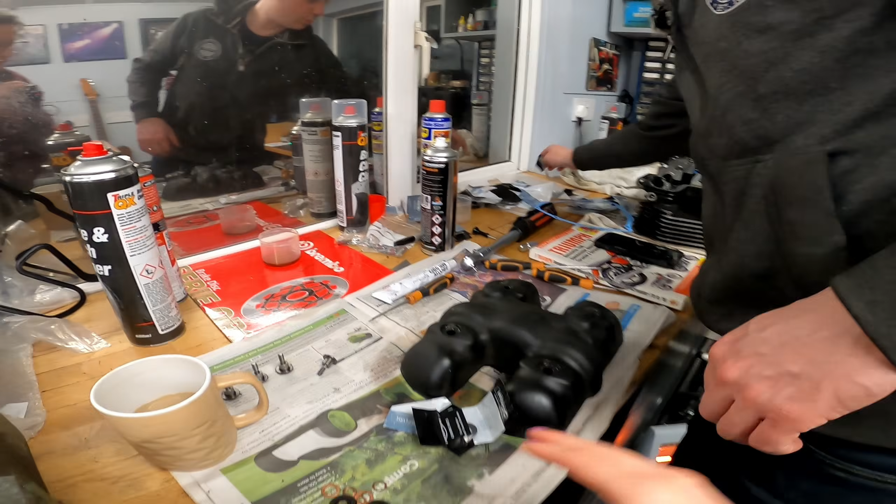That's come up really nice. Yeah, the powder coating's a bit questionable on this, but it'll detail out all right. Right, that is that, and there should be 4 of these, because you're supposed to replace these whenever you disturb the gasket. There's 2 there, aren't there? Oh, 3. To be fitted by a Triumph trained technician. Oh no. Genuine part.